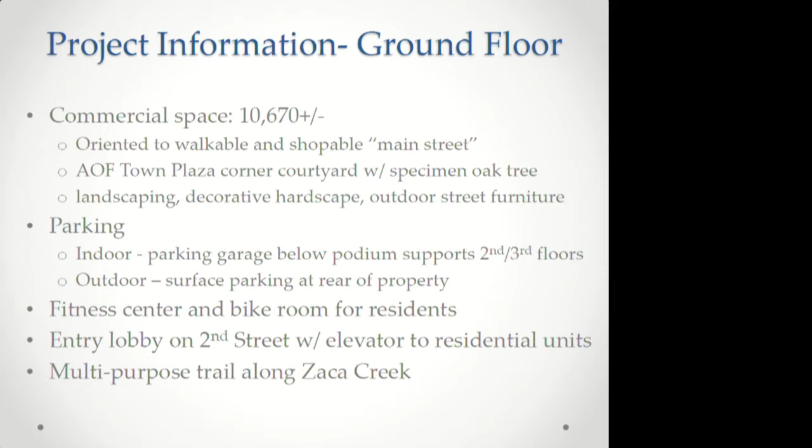There's indoor and outdoor parking provided. The indoor parking is below the podium that supports the second and third floors. On the ground floor there's also a fitness center and a bike room for residents. There's an entry lobby off of 2nd Street leading to an elevator for residential units and into the parking structure. They are also providing the multi-purpose trail along Zaca Creek.

The second and third floors are proposed for residential use, with 64 residential apartment units—a mix of studio, one-bedroom, and two-bedroom units. Private outdoor patios are shown for 36 of the 64 residential units.

The plans have evolved a little since the last time the commission viewed them—the pedestrian pathways now have more landscaping components and more amenities. The second floor has a bocce ball court, two laundry rooms, and a club room. The third floor has a roof deck overlooking the corner courtyard and Second Street, with a fire pit, barbecue, prep counter, tables, and lounge chairs.

These amenities were added to the project to reflect some of the comments given through the concept review. There's also open space provided for residential units—the code requires 250 square feet per unit for a mixed-use project, exclusive of required landscaping. For this project's 64 units, that's 16,000 square feet required, and the project has provided 16,190. There's some minor clarification needed on open space and landscape areas—recategorizing something, since there was likely double counting of landscape areas in one place—but there's enough square footage dedicated to both so this shouldn't be a problem to clean up with the applicant.

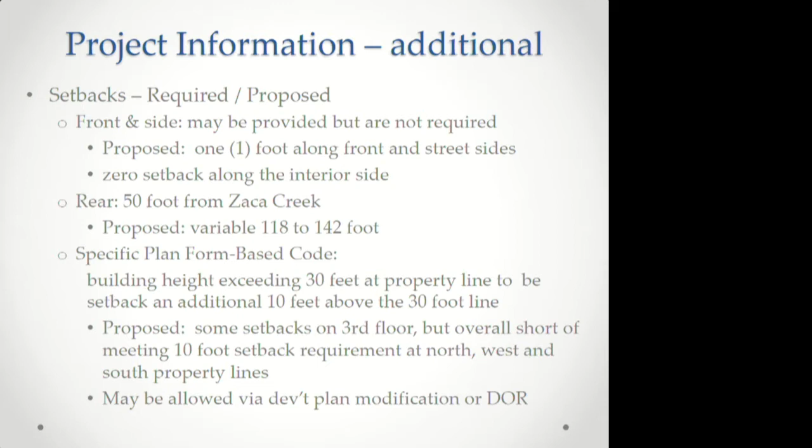Generally this is the third floor for the proposed project. There are some setbacks provided, but overall it falls short of meeting the 10-foot setback requirement on the north, west and south property lines. This setback deviation may be allowed via a development plan modification, or it may be thrown into the mix for the DOR. We typically do include setback requirements as part of the development plan modification where we can make findings to support it, so we'll see how that moves forward.

All right, a long day.

Affordable housing ordinance needs to be addressed as part of this project because residential is being proposed. It needs to meet the 15% inclusionary housing requirement, meaning 10 affordable units need to be built on site. This is being proposed as part of the project.

Another aspect of the city's affordable housing ordinance is the call for potential replacement housing for the existing 19 tenants currently living there.

This may be fulfilled by the inclusionary offset credit allowed in our municipal code 19.16.016, where a project is given credit for building affordable units as part of the inclusionary requirement, getting a credit of 2 units of replacement housing for every affordable unit they build. This would, in essence, take care of the replacement housing requirement under our current code.

The project will also be required to provide relocation assistance for the existing tenants.

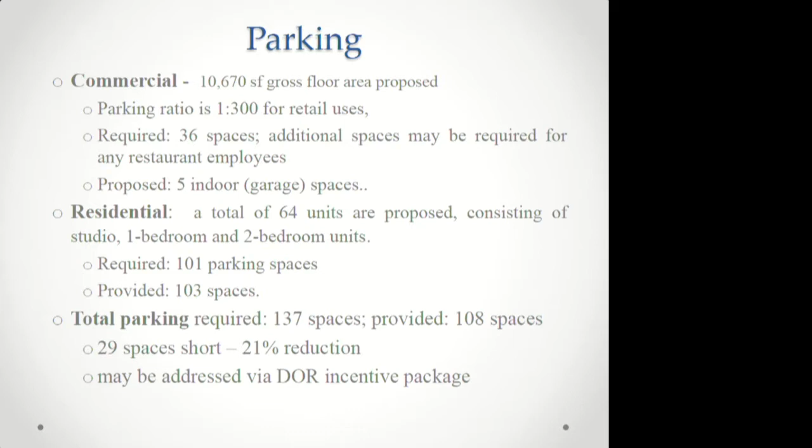For the residential, a total of 64 units are proposed, consisting of studio, 1-bedroom, and 2-bedroom units. So for the studio and 1-bedroom, the requirement is 1 space for each of those units, and the 2-bedroom units will require 2 spaces per unit. So the required parking for the residential use is 101, and they're providing 103 spaces. There's also a guest parking requirement, which they're calculating into this mix. So overall, the project requires 137 spaces, and they're providing 108 spaces, so they're 29 spaces short. This reduced parking is also an item that may be addressed via the DOR incentive package.

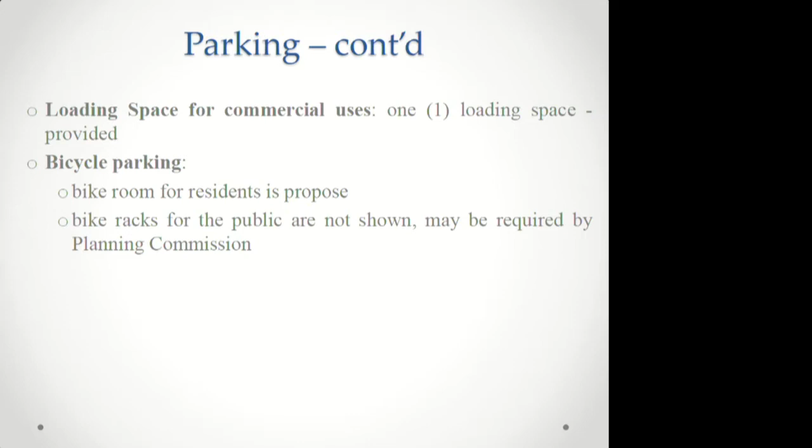Other parking elements: the loading spaces required for commercial uses, and they are showing this loading space. Bicycle parking, they're showing a bike room, which I understand is for the residents. And there are no public bike racks shown at this point, but this is something that the commission may request the project to include.

The project generally complies with the Art Deco design style per the Avenue of Flags specific plan.

The architectural design review report that was completed by the city's contract architect, we received today, and it was distributed to the Planning Commission and also provided paper copies. We'll need to provide the applicant.

Do you have any more of those? I can email those to you.

The report, in essence, stated that the site plan was complete, that is, they didn't have any comments or corrections on that.

On the building design, they had some comments consisting of comments on the north elevation. They commented on the difference in the facade design and how it lacks a little bit of cohesiveness, but we can take a look at this when we look at the project plans. And then there were some clarifications requested on some drainage items, and also labeling the elements of the project that communicates the design intent.

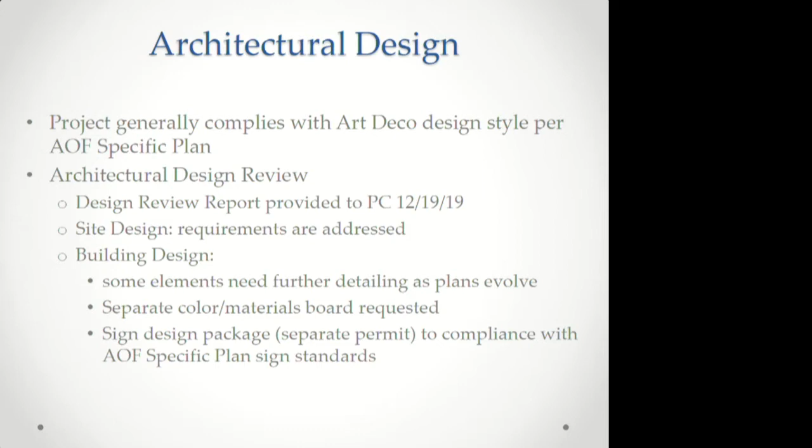So these are items that can be taken care of as refinements and updates to the plans. But in general, it was felt by the contract architect and city staff that they're meeting the intent of the Art Deco design style as set forth in the specific plan.

Okay, landscape and hardscape elements. So the standards that are required for this project would be a 15% minimum landscaping of net site area in the CR zones, of which 25% may be hardscape.

So for this project, they're requiring 10,703 square feet of landscape area, of which 2,675 may be hardscape. The project is proposing 11,012 square feet, so a little over 15% of landscape area, so they've met that requirement. And of that amount, 2,430 is hardscape, so they're under the maximum hardscape calculation.

There are 7 mature trees, including 2 tree clusters shown on the property to be removed. One of the tree clusters is labeled live oak, which is a protected species under the Native Tree Protection Ordinance. We'll need to get measurements of the cumulative total of the stem diameters at breast height, and if this measurement is 12 inches or greater, then the cluster would be considered a protected tree, and it would need to be replaced at a 3-to-1 ratio.

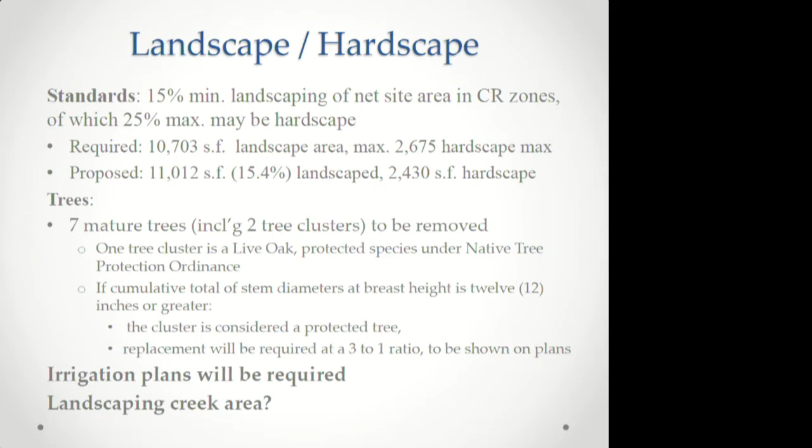And then in further iterations of plans, irrigation plans will be required. And staff had a question as to how much landscaping would be done in the actual creek area, kind of similar to how the Avenue Heights just north of 2nd Street treated some of the creekside areas.

So as far as signage, for commercial projects, allowable signage area is calculated at 1 square foot per lineal foot of frontage along the longest street frontage, which for this project is 2nd Street, and then a half a square foot for the side street frontage, which in this case would be the Avenue of Flags. This is for the purpose of calculating sign standards. So the maximum allowable square footage of signage that the project could have is 451 square feet.

They are proposing 174 square feet, well below the amount. This information was provided to us as supplemental dimensions to the project plans that were submitted, and I have a copy of those plans and can show you what those measurements and locations are.

A separate sign permit will be required for the project because they are not including a request for a sign permit as part of the development plan. At the time the sign permit comes in, that will need to include a master sign program because the project has more than 2 tenants. At that time, we would review the sign program to be consistent with the design elements of the specific plan and the Art Deco design style. So this would be coming in at a later date.

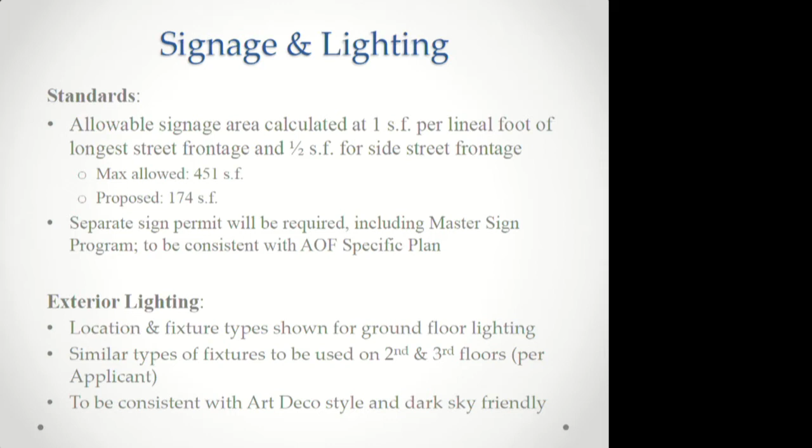Exterior lighting fixtures and their locations are shown for the ground floor. The applicant has indicated similar types of fixtures will be used on the second and third floors, though some layouts are still in flux, so exact locations are still being finalized and will be included in future iterations of the plans. They will be consistent with the Art Deco style and dark sky friendly.

Vehicular access is provided from one main driveway along 2nd Street at the rear of the property, providing access to both the exterior parking area and the indoor garage. It also provides potential future through access to the adjacent property on the south, which was reflected in the Avenue of Flags specific plan as something the city would desire for secondary access at that location, and any property developing to the south would be required to hook up to this location as well.

Pedestrian access on the ground floor to the commercial uses is along Avenue of Flags and 2nd Street, at sidewalk level with direct sidewalk frontage. The residential uses are accessed through an entry elevator lobby on 2nd Street, with stairs in the parking garage and at the southwest corner off of Avenue of Flags providing entry from different locations to the residential uses.

Street and sidewalk improvement plans will be required for the project as part of the building plan review set.

As mentioned before, the existing lot configuration consists of two parcels, and the applicant has filed a lot line adjustment proposing to remove the interior lot line of the two parcels, thereby creating one proposed parcel. So there will be no issues with that conflict.

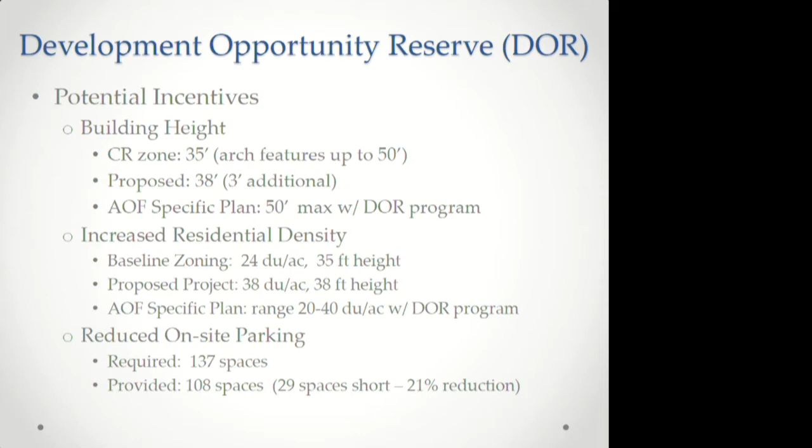And the reduced on-site parking, required parking is 137 spaces, and they're 29 spaces short. So these would all be put into a potential DOR package, and we would be sitting down with the applicant to go through potential public benefits that they are proposing to offset

the incentives that they're asking for the city. And the potential benefits could consist of, for example, construction of an off-site parking lot, contributing parking spaces, or improvements to the median, constructing a public restroom, and others that may pop up as part of our discussions. The only thing I would like to add here is that the benefits that the applicant is providing should kind of match.

If they're requesting a parking reduction, then they need to be throwing in some parking, and if there's a building height issue, what is being proposed that could offset that. So we will be looking at that. So it would be kind of an equivalent type of a program.

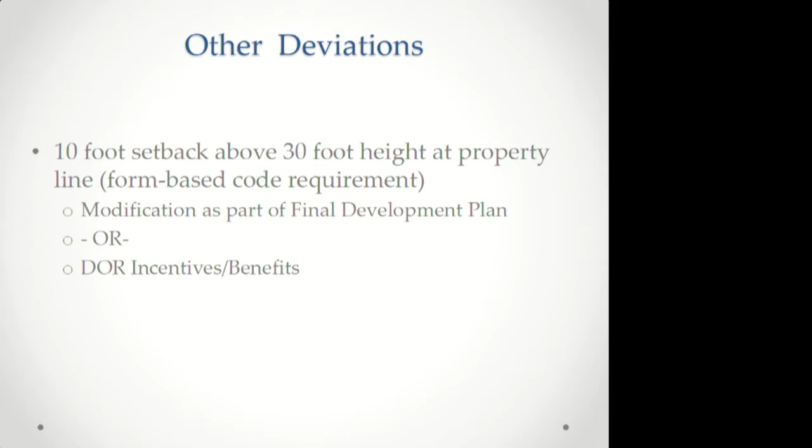Wasn't there also maybe a DOR on the setback? So there could be a DOR. We have in the past handled setbacks as a plan modification, and so we're still looking at that. And if we can make the findings on that, and depending on the comments that the Planning Commission may have and come back from the other departments, if the setbacks and the overall project design seems to work, then maybe that's just a plan modification. So we'll see how that proceeds.

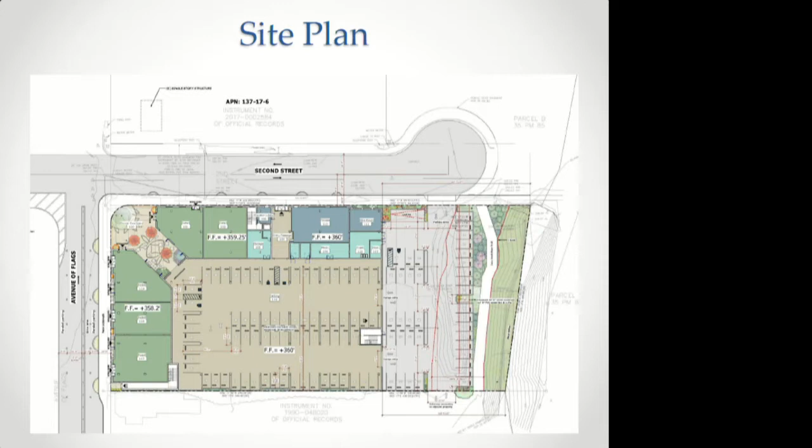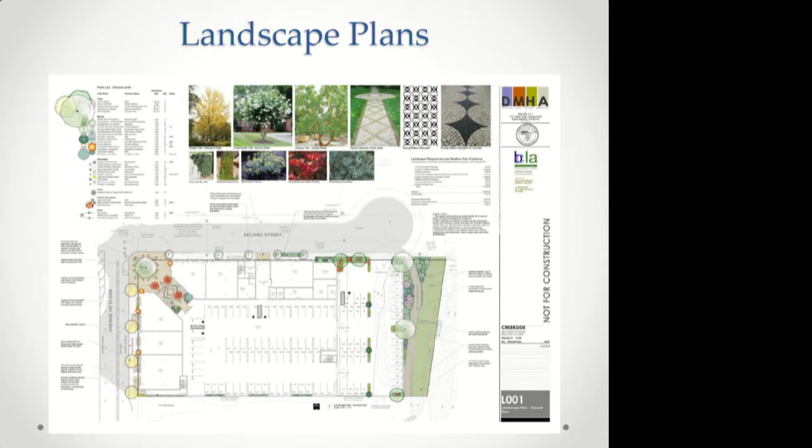Just really quickly, street trees along Avenue of Flags, specimen oak, street trees along 2nd Street, other perimeter landscaping here at the parking area, and at the edges here. And some of these trees, as we'll see when we do get to looking at the landscape plan, do come up through the podium level up to the 2nd and 3rd floors.

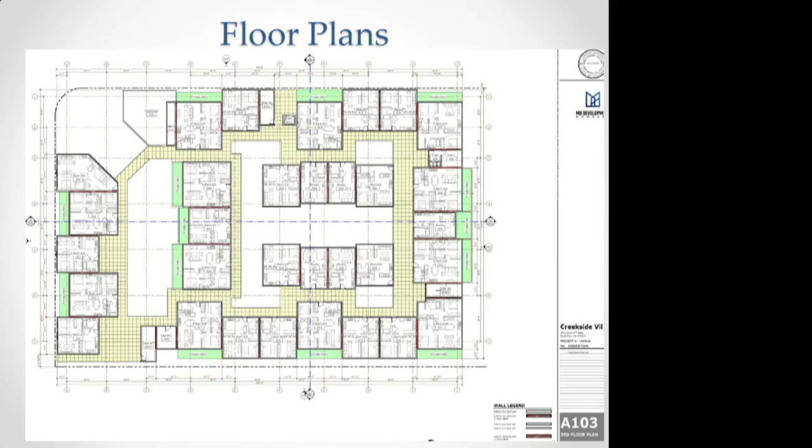And this is the 3rd floor plan. So these areas, I believe we were looking at this earlier in the office, and these appear to be open to below. And when the architect gets up, maybe that's something that we can just clarify how these all interrelate on the 2nd and 3rd floors.

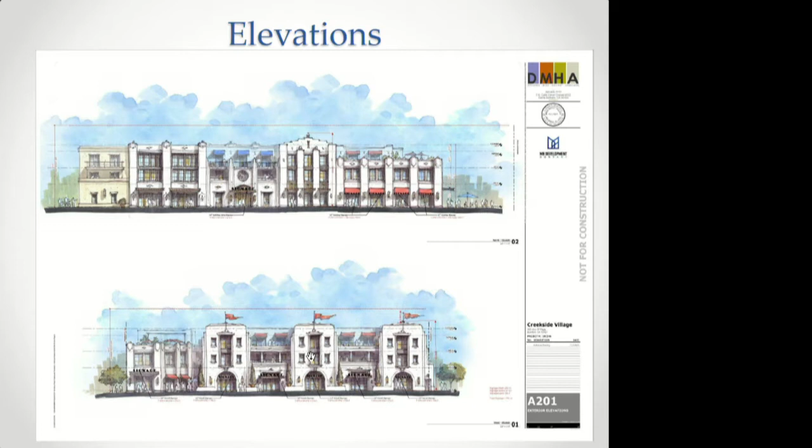This is the 2nd Street frontage, and this is the Avenue of Flags frontage. These are the east elevation, which is the rear of the property.

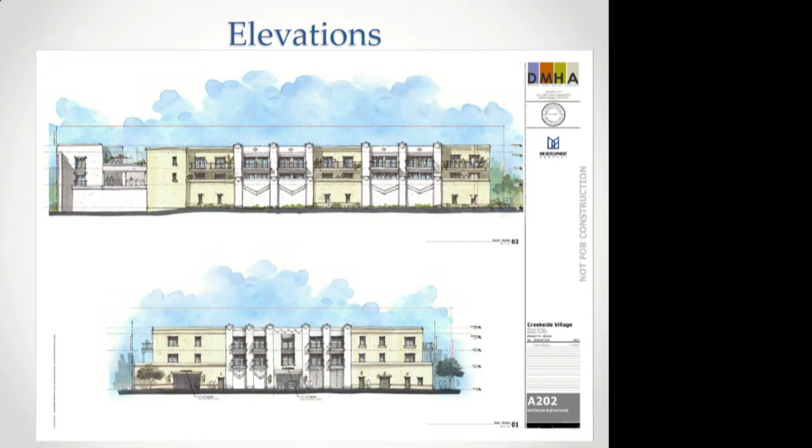The entrances to the parking garage are here, and this would be the interior lot line, which faces south to the neighboring property adjacent.

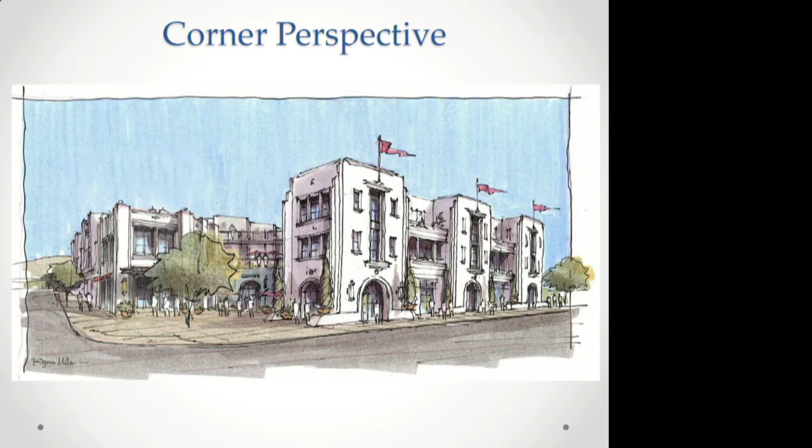This is a perspective showing the corner courtyard. It's been configured a little differently and has more of a courtyard feel to it.

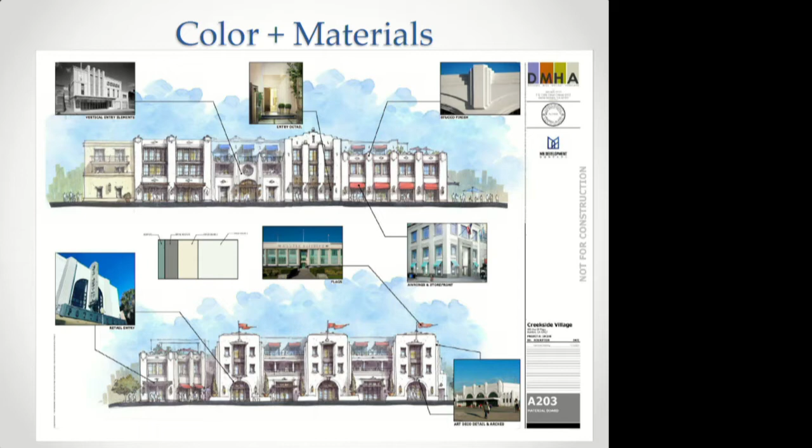Some indication of color and materials have been provided for future meetings. As we get closer to the public hearing, we will require a color and materials board, but this is an example of what the project is looking at including. We did have one question come up as to whether this will be smooth stucco, so that's something we'd like to clarify.

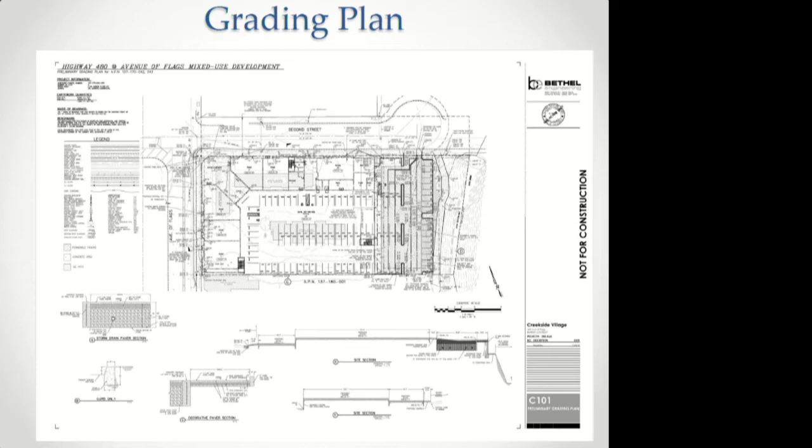This is the grading plan, which Public Works reviewed. There were not a lot of comments on it. And this is the lot line adjustment map.

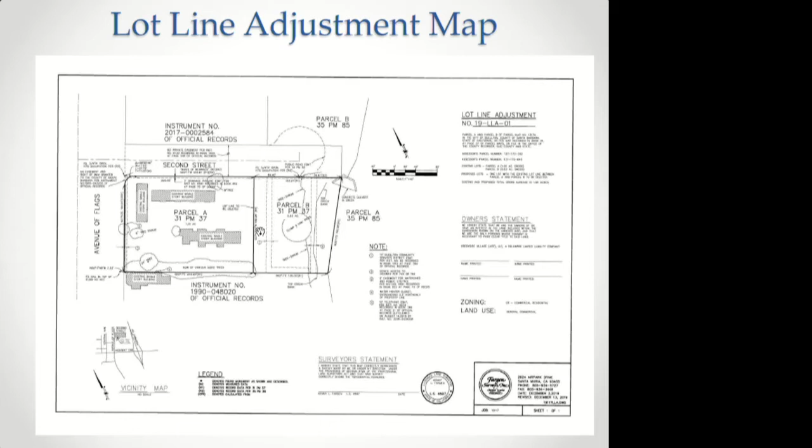Again, there are 2 parcels, and they're simply proposing to eliminate this lot line in the middle here. These comments were in your staff report. I'm happy to answer questions about these, but I'll just quickly run through them without a lot of detail.

There will be some minor technical updates to the project plans, as I mentioned, environmental review, and meetings to flesh out the DOR terms and conditions. We put in here that a minor use permit would be required if the signage exceeds 400 square feet. It doesn't look close to that, but in case it does, a minor use permit would be required, along with a separate sign permit and a development plan modification for the 3rd floor setbacks.

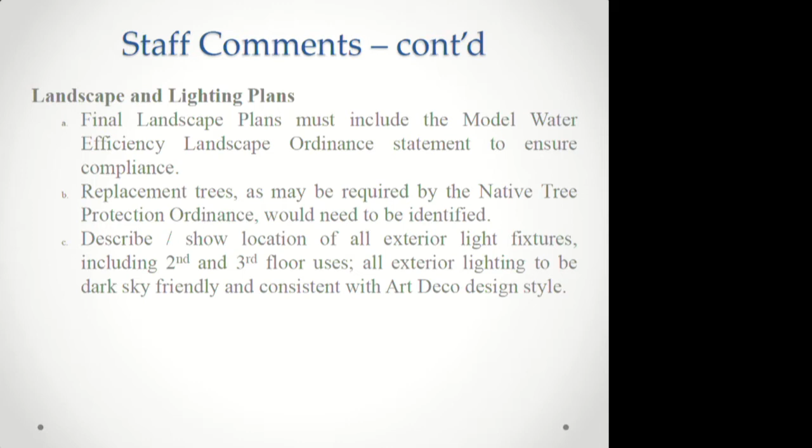Future iterations of the plans would need to address any comments in the design review report, any comments from tonight as applicable, and the color materials board. The applicant will need to submit the trash and recycle area plans to MarBorg for review and incorporate any required design considerations into the next version. The final landscape plans must include the model water efficiency landscape ordinance statement, which was not on the current plans but can be added. Replacement trees would need to be shown if the native tree cluster is found to be of sufficient size to warrant replacement, and they will need to show locations of exterior light fixtures on the 2nd and 3rd floors.

These are Public Works engineering comments on the plans. A separate street and sidewalk improvement plan will be required as part of the building plan submittal. The flood study had just some minor technical corrections found in it; nothing major, just minor items that will need to be corrected. The grading plans would need to include current topography and at least 50 feet off-site as well, so it needs to show the adjacent property. That's something that can be added to the grading plans.

The applicant has indicated that they've made contact with Department of Fish and Game and Fish and Wildlife. There hasn't been any meaningful comments at this point because when they were reaching out, the project didn't have a formal submittal and permit numbers. Now that they've submitted the formal application, they can continue discussions with Fish and Game on this item. The last item here is utility plans, which will also be required as part of the building plan submittal.

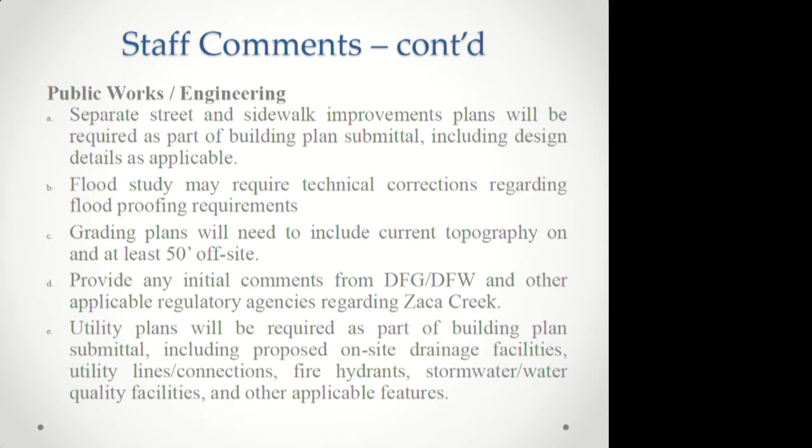As for the lot line adjustment map, we've spoken to the surveyor who prepared this, but we're going to be reviewing it to make sure it clearly delineates the existing versus proposed property lines and the initial versus final lots. It's just notations on the plan sheet, nothing major.

So I would yield to the Planning Commission if any of the members have any comments at this point, or questions, before we bring up the applicant.

Okay, I think I had some questions for staff here. Any questions of staff?

I had that one, and this might be for the applicant. In the presentation section, this is a tiny little thing. Bottom of page 3, it says the applicant has indicated they are in the process of addressing the existing water heater closet encroachment on the southerly property line. I was just curious what that was. Should we have the applicant address it? Let's do that later. I'll write it down.

We've just indicated some outdoor seating and different ways for all of that to be developed, which we want to take further. Also this looks down, you can show with the little hand area, looks down into the open court, so that looks over some handrails down into that area. In those spaces you'll be able to orient to looking out towards the north and to the west.

I also mentioned the bocce ball court, we're considering it as one of the options, but I wanted to put it in there to show kind of the size and scale. So that's like a full regulation bocce ball court. Just these open areas are very large. Almost all the area in brown is being able to be used by the residents as open space.

There are some spaces that are covered by the third-story walkways, but the bocce ball court area, all of this is open to the air, and all of this is open to the sky. But these are very, very large spaces, so we can make a mix of amenities in there with tables, chairs, or any other kind of things. I just wanted to show the scale of how open these spaces are, so you can really live on the second floor of this building.

We also took out one of these units and added a club room here. So for the residents, if anybody wanted to have a private event or party, or if anything happens on the avenue, they can rent out a kind of private club room on the site. And then the third floor, we put the wine deck up there. So there will be a third floor wine deck that is well positioned for any of the events on the avenue, as the specific plan calls for, like the auditorium and concerts or anything else. So it should be very cool.

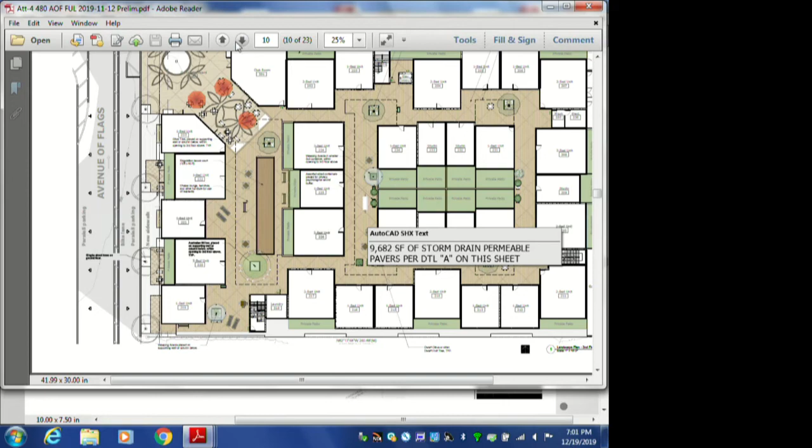We're dealing with building blocks, and let's go look at the next plan real quick, because I think these kind of all tell a little bit different type of story when you look at the second level, and then there's a third level.

So we included this, there we go. So this again shows the amount of open space. The way that these units offset, there is probably an opportunity here if we wanted to notch something out or open it, but these are common amenity spaces really, which are pretty nice. This is your standard condition that you get, a 5-foot hallway.

So we've really tried to open this looking down into that next space, and same thing here with trees. One of the things we wanted to do is pull those trees up because they would be actually viewed at that level. So that's where the 3D model, you're exactly right on, with understanding how that works. But it's really much more of a village and opening.

What we did for this plan from the other one, we consolidated. We had a bunch of these smaller spaces like this, and we said, let's really minimize these little areas of open space, and try to provide these big open areas in the project, which will be much more, we think, a lot more meaningful.

It's hard to imagine a bad unit here. You come over here, you get the views out this way, and then you get the views in here, and I think the computer model is really compelling when you see moving from one space up and how you look through those open areas there. It feels pretty good to us.

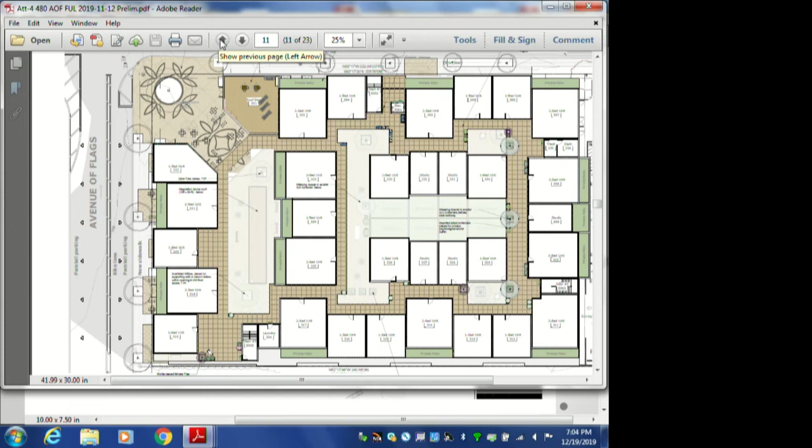On the second floor, in those private patios that are back to back, are you going to separate them somehow? Yeah, we've shown some screens at like 6 foot high, so those would be private patios.

What we found is that on these kind of units, exterior open space is of different value to different people. Some of these people may just love to have the views where they can sit out and look over the avenue. These people might really appreciate a private patio where they can just go sit. And yes, they're going to have units up above, but that's like all over Europe, and even in Santa Barbara, these are highly desirable. If you look at our floor plans, these would be sliding glass doors that open out into individual patios that open all the way up.

And we had a circulation area in here, and we just said let's just get rid of it. We were really trying to make all the circulation pathways efficient. This little diagram here helps to show how cool you're undercover here, you're open here. This is like some of our housing projects at Manzanita Village, where you've got these experiences where this opens up and then you're compressed a little bit, then this opens, even if you're undercover here, this is all open above. So there's a lot of variability on the interior.

Just to touch on that, as Michael mentioned, we're still flexible with this, but we used to have these units smushed together and then the private patios on this side. We felt that, and I've lived in a multitude of different apartment buildings and seen them, when you're walking through and somebody has like a 3-foot wall, it's kind of awkward to look into their private patio a lot of the time. So we thought it'd be interesting if we combine them all, and whether we screen them, we'll work on that depending if the commission or council or city requires it.

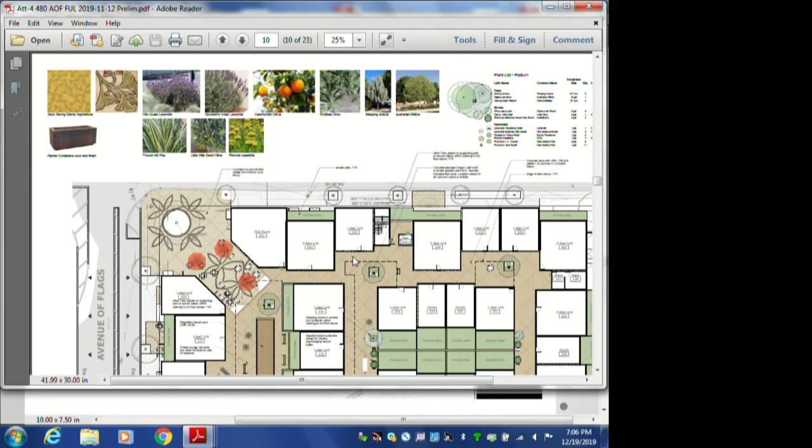Getting through, remember last time there were some dead end corners, still meeting code, but you can kind of get wherever you want to get in the project now with the interconnected walkways and overlapping pedestrian spaces. We can dial these in a bit more, but they're pretty nice little units too. All of these are fairly well vetted, and we've just plugged them into the computer.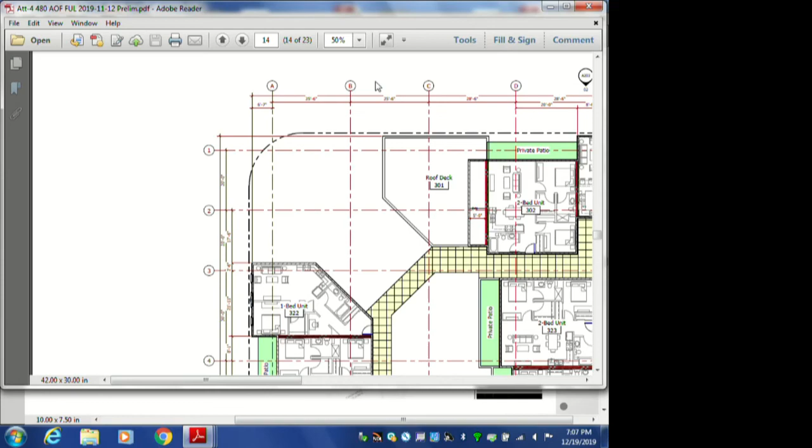So Mike, will the walkways there, that's the 3rd floor, will they be covered somehow by either the eaves or? We have not shown them as covered. We haven't done a roof plan. Some of the areas can be on the ground. This was a question, we haven't really gotten into that level of detail.

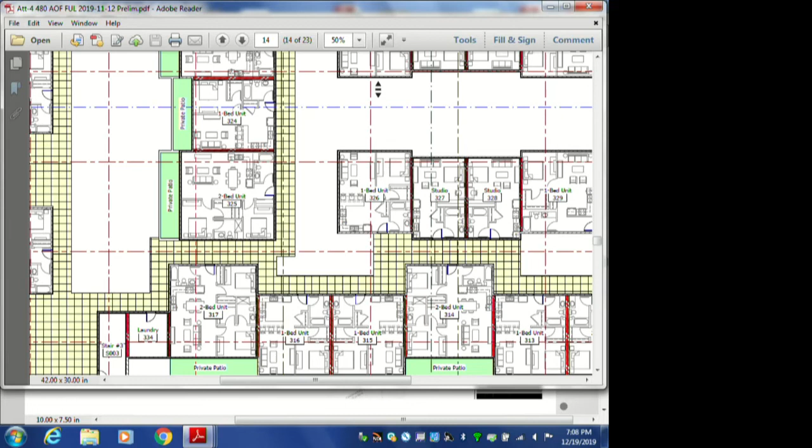There's pluses and minuses for it. Obviously the plus is if there was some sort of cantilever covered walkway, which works really well with the Art Deco design, but it also costs you some of the visual open feel. So we haven't really looked at that 3rd level being covered. The 1st level would be, and certain areas would be between the units. So looking at those roof connections on the 3rd level is kind of a next level of design.

We haven't really gotten there yet, but you want to be able to walk out of your unit and not get wet. So you need to find a way to make that happen and still get to the stairways.

It's a trade-off visually too, because this is going to be a 3-story building, but with the step backs and the way we've massed it, it's not going to seem as large as you'd think. However, if we covered the whole building like an apartment building downtown Santa Barbara or anywhere else, it would seem a bit out of place as all just an interior apartment building. So we wanted to keep that Santa Ynez Valley open feel.

Maybe we'll do a retractable kind of awning, or I've seen poles with cloth that you can put up, or a tarp, if it ever rains. It doesn't rain up here often, but yeah, we're dealing with that.

The other idea was that there could be areas where you pop out, like for instance we pop out here and come back, and maybe come back in around like that. So there would be a way that all of that would be covered, and then you don't cover certain other areas. So it's getting into the real detail of how all that masses up.

It's just I think water. Pardon me? It's just water.

Yeah, we're thinking through the 3-dimensional quality of the space. You can kind of get a sense for it by the negative space, the white there is all open space. So we've really tried to work hard to listen to what you guys have commented on. Those are pretty generous spaces when you look at comparable types of units.

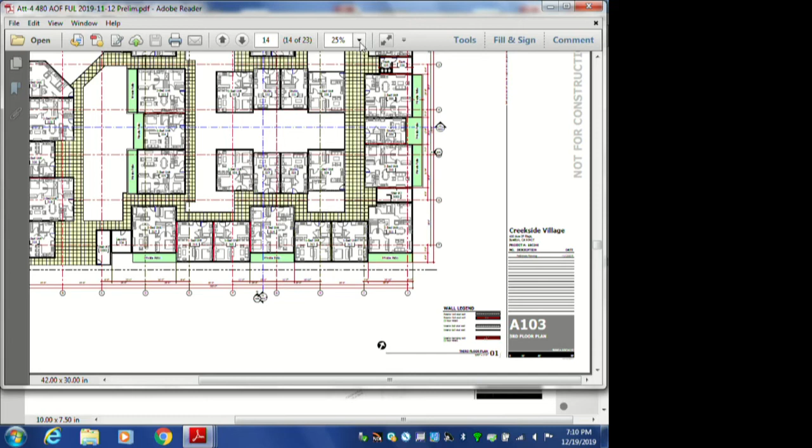Let's go to the elevations real quick, and I can talk about those. Let's see how to navigate these files. These big files were a little bit of a challenge to... Do you have that on the other PDF though? Might be in the presentation that you did. Oh, the elevations, yeah, I do.

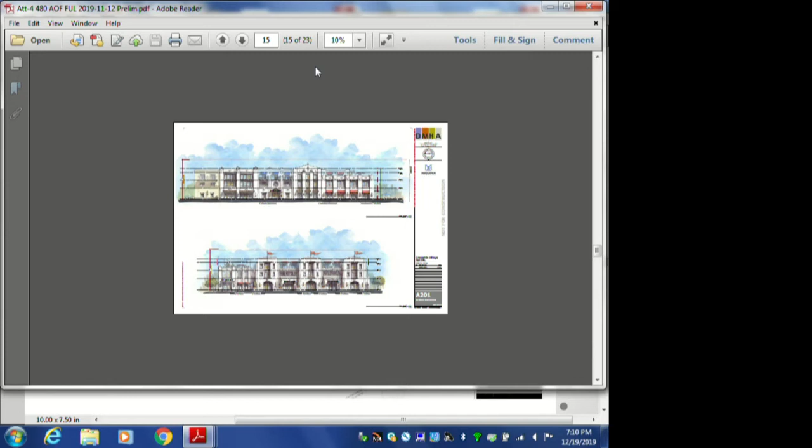There we go, that's what we want. And I believe the plans we submitted also have a sample cross-section as well, if you want, those are in here. Some of these, like the landscape plans, I could not pull off. So tell me which one of these you'd like. Well, we can just zoom in on both of them, actually. I'd like to zoom in and address some of the comments since we were last here.

And getting all of this little detail, although it's just suggestive, I think you can get a sense for how strong it would be architecturally. Maybe we can just go around to the corner, go a little bit more to the left there.

While you're on this first floor, one thing Red brought up was the flood mitigation. I noticed that for the building across the street, 518 Avenue of Flags, in their plan they had raised the building by 4 to 5 feet, and even Avenue Heights chose to raise their apartments. But we felt that if Avenue of Flags is going to be a main street, you really don't want to be walking up ADA ramps to get to the street frontage. You want to be able to walk in and out.

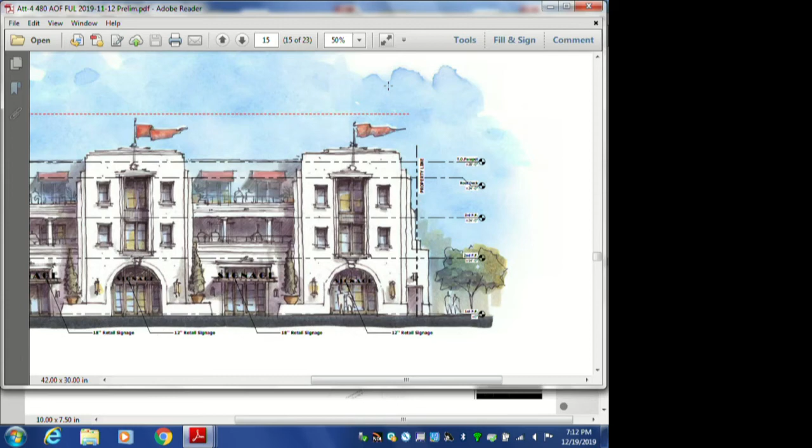I mean, we can scoot now. Thanks for addressing that, I was trying to figure out how you were going to do it.

Yeah, that was huge. We had to stop, we were in the process, planning to submit in September, but it took us about 45 days of saying, look, it's either going to cost us $2 million to raise this building and we're dead in the water, or we can figure out how to do it significantly cheaper and still keep that really important feel of not being 5 feet off the ground to start with.

And the way that works, all of this part of the building is waterproof. It's just the openings that have the gates, and those have to be kept on site. There are floodgates put in there because you only know a day or two ahead if you're going to have a massive flood. So they flood-proof these openings, which allows the building for the water to come up to whatever the 100-year floodplain is, and we're still above it. Luckily, all the residential is about 13 to 14 feet above anyway on that podium, so the ground floor is really just commercial, which helped.

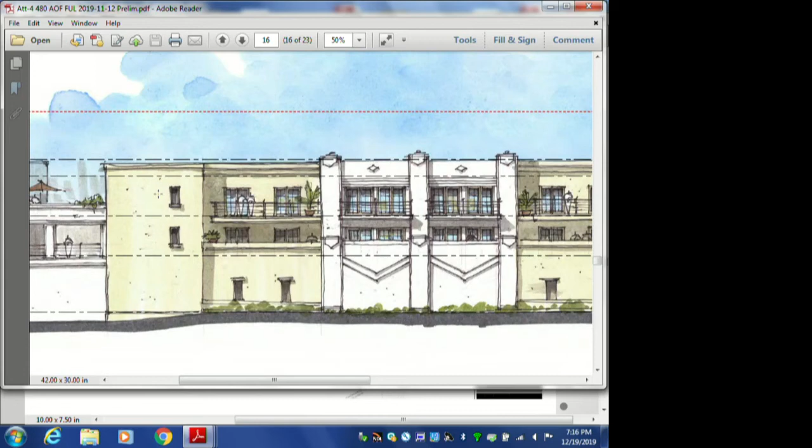And I think they liked it. We actually had looked at a number of options there. These are some classic proportions that come off of an Art Deco style. The buildings change a little bit as you go around the corner.

One of the comments was, what happened with this little piece? And I happen to agree with him. We were focused on the front of the building wrapping around, and this could easily be - we could turn this into more of the front building and wrap it back to some level. So that could be a design refinement.

But basically, these are the commercial areas down below. This is the fitness room. There's the primary entrance for the whole complex. And this is pretty traditional in the Art Deco style.

They'll just do something kind of fun and creative on the building, and all it's doing - this is all residential units - is playing with the mass, bulk, and scale to articulate, in contrast, the balconies to where the rest of the building is. This is that wine deck up above that looks down into that area. This would be the little clubhouse room right there on the end.

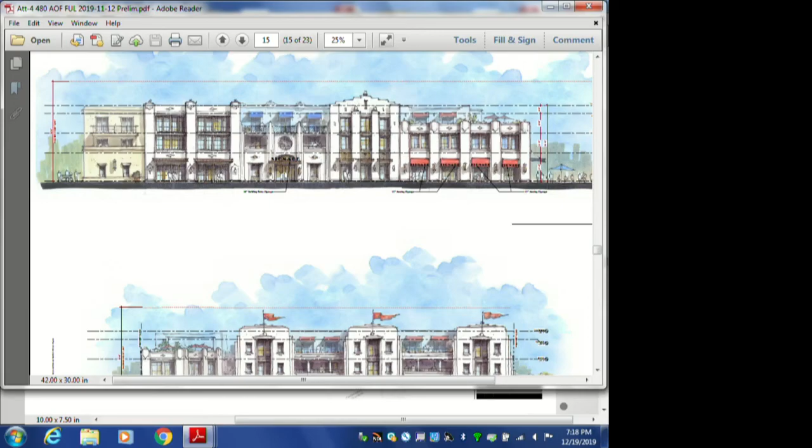And then this can easily be wrapped in to be a little bit more of the front of the building, which is, I think, what they were requesting. And then we go around the back of the building. Let's look at those other two, just to see - this is that part right here.

So we were kind of thinking through where do you want to stop this. And so we could easily figure out a way to wrap part of the building back around to there, and then come up with a rhythm that still has an Art Deco feel. This is, again, the back side of the building, but we still wanted to make it look nice.

So there's the front entries, the balconies, the views that look out to the side, and here's facing probably the next project. So literally, we tried to think through something there that's going to be addressing the next future building. The top is the south, right?

Yeah, this would be the south elevation, correct. So we met the criteria for the setbacks, and this shows how those decks and patios would all work. There's that second level deck. You start to get a feel for the character right here.

So if we start having overhangs up here, it really changes it, so we want to be really strategic where we do that. And then I think there's a comment about this becoming a ground floor access to the main parking area, which we thought was fine - it just seemed like a logical thing. Yeah, we had the exit stair there, so let's make it an entrance.

And then here, this just shows how you could come in and out of the parking areas. Instead of the whole building being white, we liked a lot of the projects we looked at that had a real difference of impact just from the plaster textures. This will probably be a smooth steel trowel plaster finish, which is traditional Art Deco, with mostly white and off-white kind of paints.